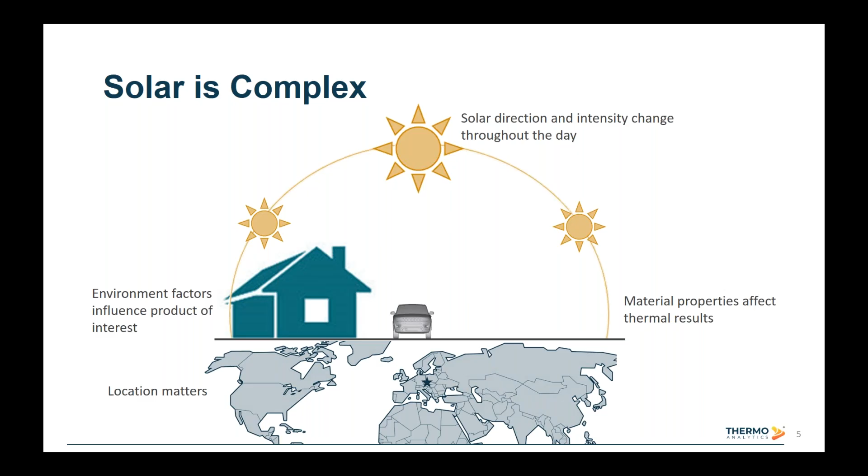However, modeling solar doesn't have to be. Within TAITherm, we include environmental effects with a weather file, which can be from any location. We include solar, direct, diffuse, and reflected. We can see in this little schematic here, we have solar reflections, which are both specular and diffuse. We have incident solar, direct and diffuse, and then we also consider radiation exchange with the sky, as well as wind convection with the natural environment.

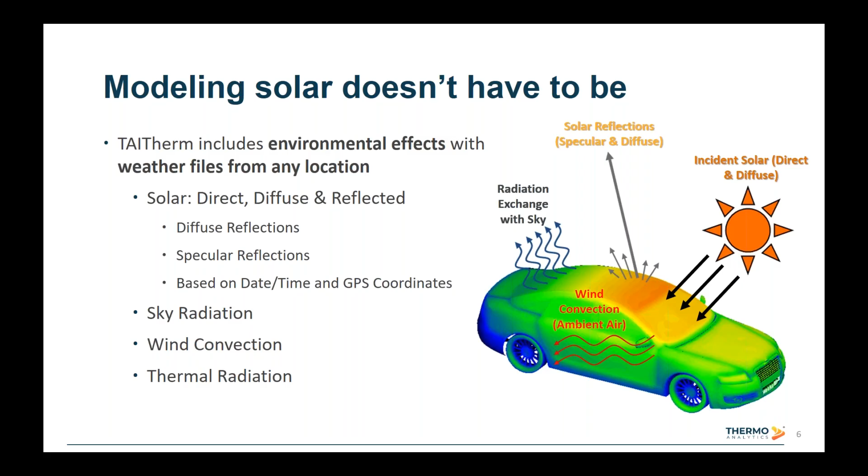Just a brief overview of the different software packages that ThermoAnalytics offers if some people on the line are not familiar. So we have TAITherm, which is the flagship thermal software. That's what all of the simulations in today's webinar were run in. And then we also have MUSES, which is the infrared signature simulation software. With both of these packages, we have a number of different extensions that can be used with them. We have battery, human thermal, exhaust, and rapid flow. We will be using human thermal for one of the examples today. And then we also have CoTherm, which is multi-physics co-simulation. And with that, we also have the drive cycle extension, which can be used with CoTherm.

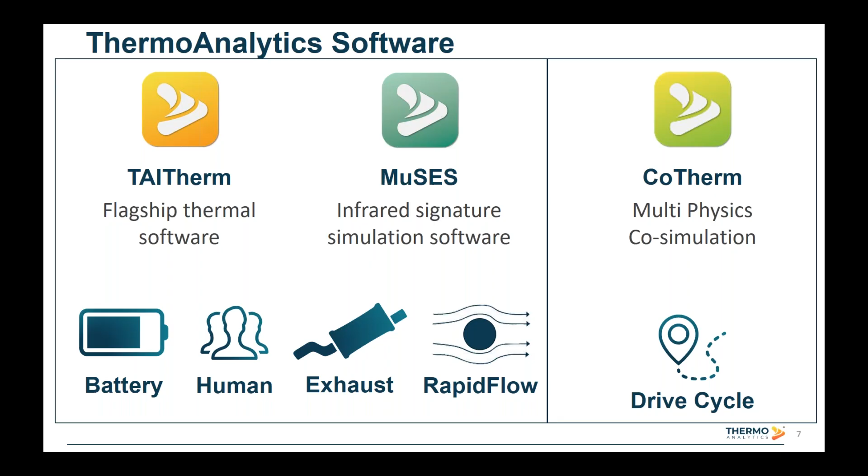Since our examples are in TAITherm, just a little more information on that main piece of software. TAITherm computes heat transfer. It predicts temperatures. It can be run in transient and steady state. It includes convection, conduction, and radiation, as well as natural environment. And that natural environment piece is the piece that we're focusing on today, since we are specifically interested in solar loading.

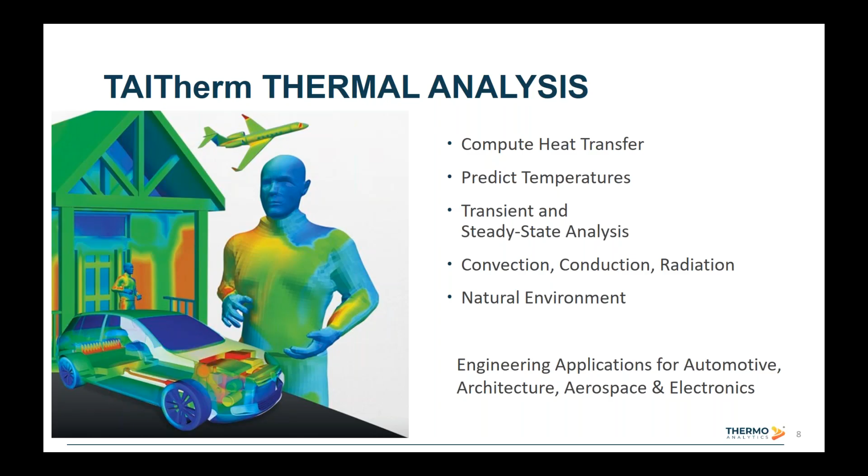Let's take a look now at our examples. So first we'll start with 2 architecture examples, the first of which is a concave glass building, and we want to look at the building effect on parking lot vehicle temperatures.

The setup for this model is a glass building in the sun. So we can see that we have this concave glass building, and then we have a parking lot in front of it with a number of vehicles parked in that parking lot. And because of the curvature of the building, we can get an increased solar loading on the vehicles in the parking lot. This particular image is showing us temperature. So we can see that we have some concentrated temperatures on that center vehicle in the front row, especially on the hood of that vehicle.

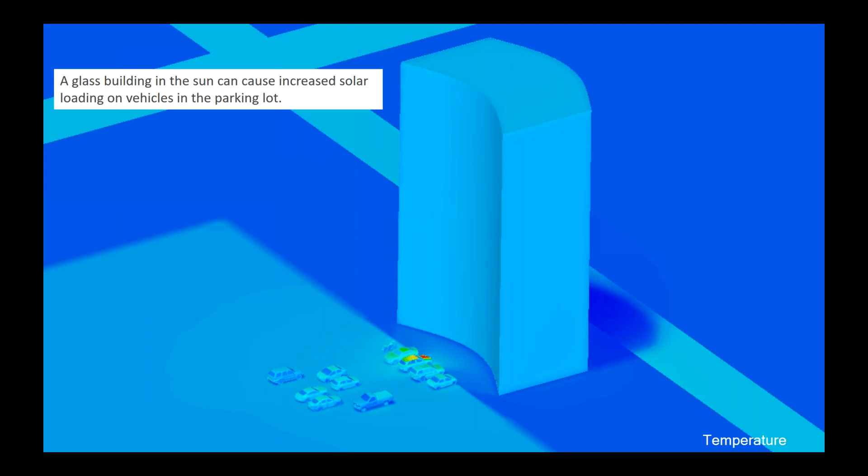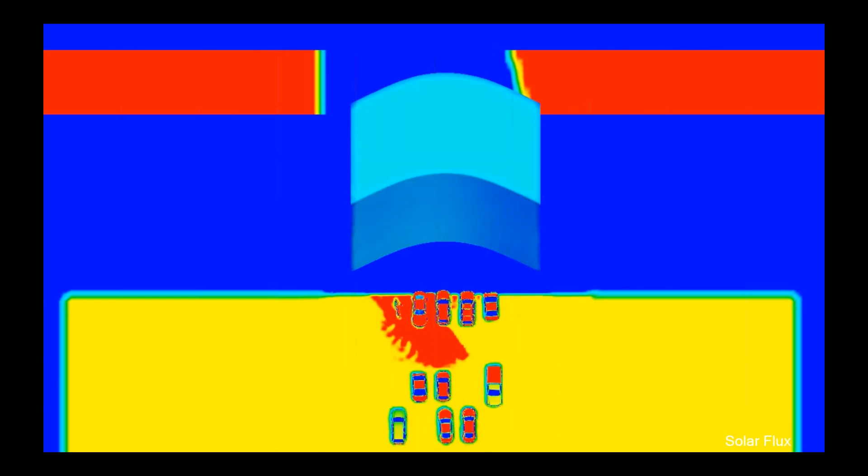We can also look at an animation of solar flux. So as the solar is moving throughout the day, we can see that those reflections are changing. And then they concentrate on the vehicle, specifically that center vehicle, around the middle of the day. And so that elevated solar flux and those reflections, that's what's causing the elevated temperatures that we saw in the previous image.

Now with our software, we can try different glass properties easily to be able to see what effect that would have on the simulation results that we're interested in. So in this particular case, we just quickly changed the glass property from what we're calling this original glass, which had the very high temperatures, to a less reflective glass. You can see that with the less reflective glass, we significantly lower the temperatures on the hood of that vehicle.

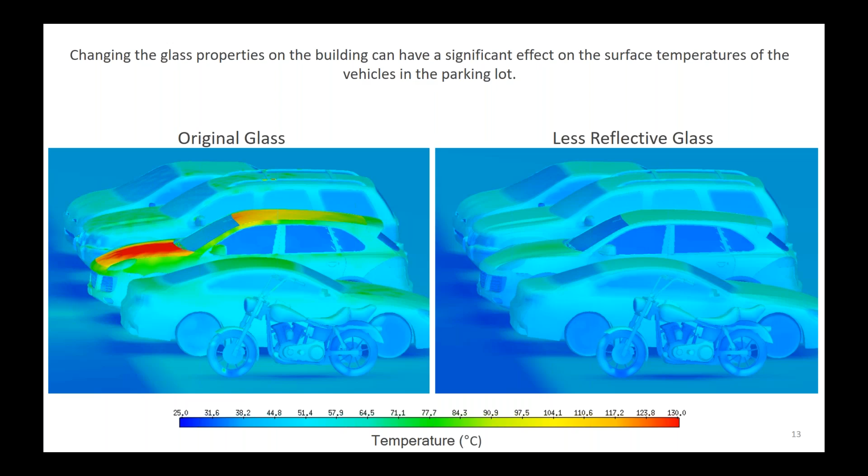Now with this, we would also want to consider what's happening to the people inside the building. And we'll look at that a little bit more in our next example with a different architecture example. So just because we change the glass to help one side of the equation, we'd also want to think about the people working or living in that building and what effect that would have on them. So we'll look at that kind of interior effect with this next example.

This is a glass office building, and we'll look at some different interior temperatures with different glazing materials. So with this, we have the building geometry, as we can see here. We have normal glass on the left-hand side, all of the blue color. So you can see a lot of the building has these big windows that are covered by this normal glass. And then on the right, we're changing that out to be a more reflective glass. That's that light green color. So we changed all of the windows, just not that glass railing, to be that more reflective glass.

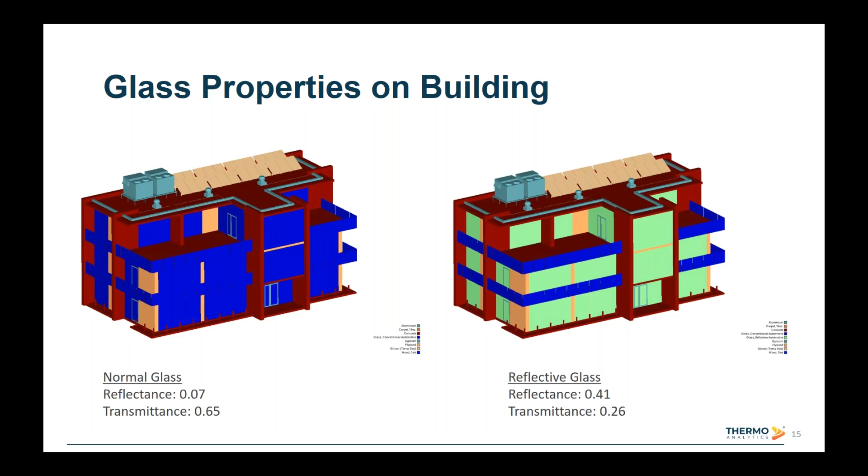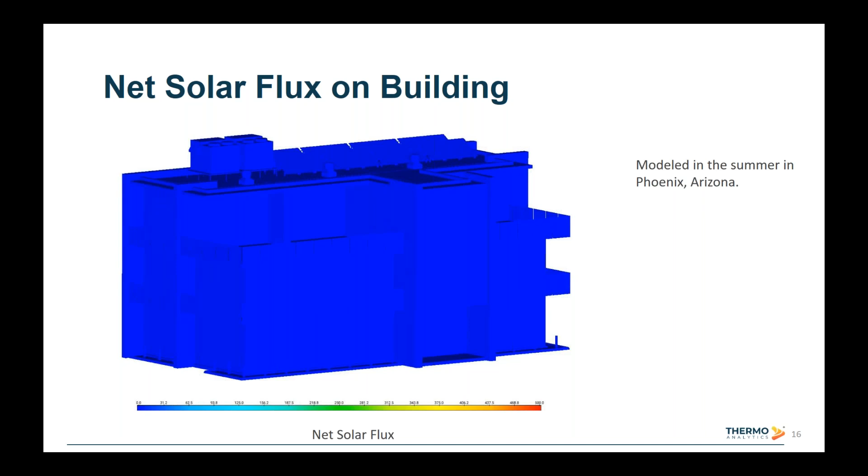And then we can see what effect that has on our model. So here we can see the net solar flux on the building. This particular model was done in Phoenix, Arizona in the summer. It was started very early in the morning. That's why we're not seeing the solar flux initially, but then we're seeing that build throughout the day and then also move across the sky.

So here we can see the difference between the two glass types. In this image, the glass is hidden so that we can actually see the net solar flux looking through the glass inside the building. So the net solar flux is higher with the normal glass inside the building than it is with the reflective glass. We can also look at this from a different perspective. So this image is taken as if we're standing in the building and then we're looking toward those windows. So we have that same shadowing of the net solar flux through the windows.

And this is just to see the values in a graphical form. So again, we can see they're pretty consistent until we get to the point where the sun is really kind of shining through those windows. We can see that uptick near the end of the simulation. And again, we can see that with the normal glass, we have much higher net solar flux than we do with the reflective glass.

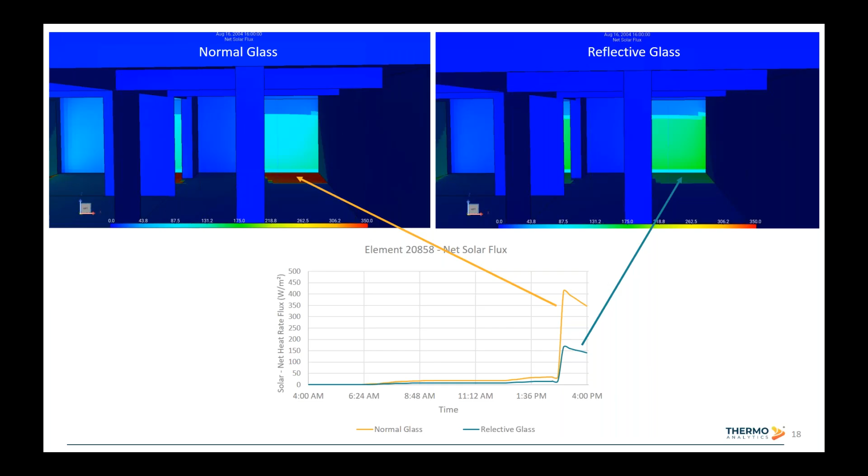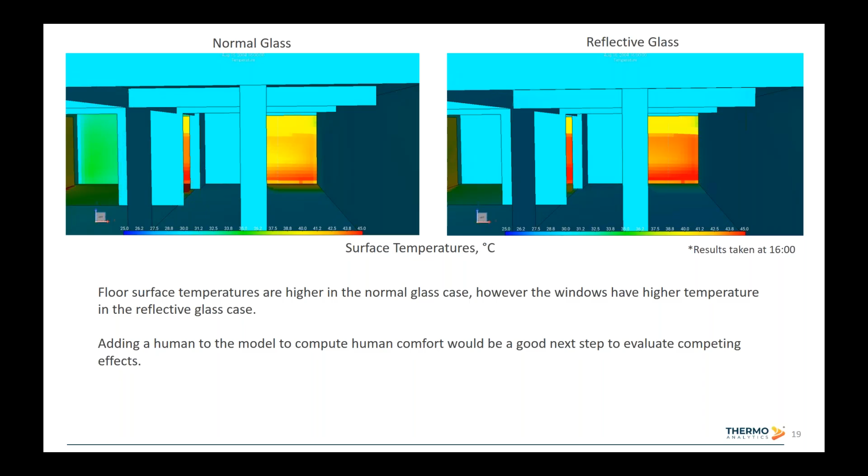What might be interesting as an extension to this model would be to add a human representation using our human thermal extension to the model to see how those different effects would affect human comfort, since they'd be a little bit competing. We'd have the higher temperatures in the reflective case, which would cause a higher radiative load on the human, but we'd also have lower solar. So it would be an interesting extension to the model.

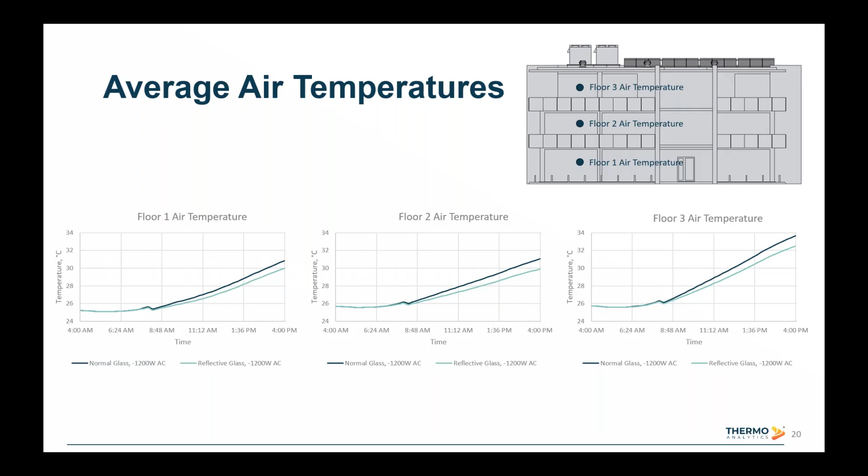Next, let's look at some vehicle applications. The first one we will review is a cabin comfort application, where we will look at the effect of glass properties on power consumption in a vehicle cabin.

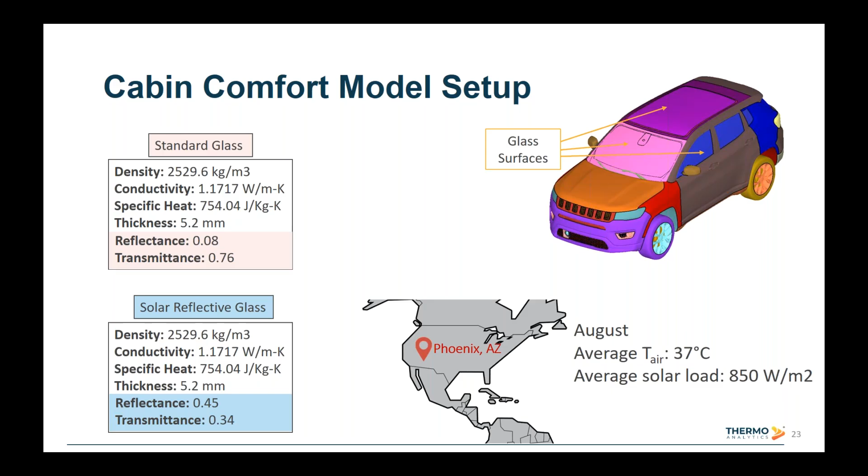And this model again was run in Phoenix, Arizona in the summer so that we can have high air temperatures and high solar loading. This model does include using our human thermal extension, and we're using 4 50th percentile humans in this model. There's clothing applied to these humans to all areas besides the face, head, neck, and their hands.

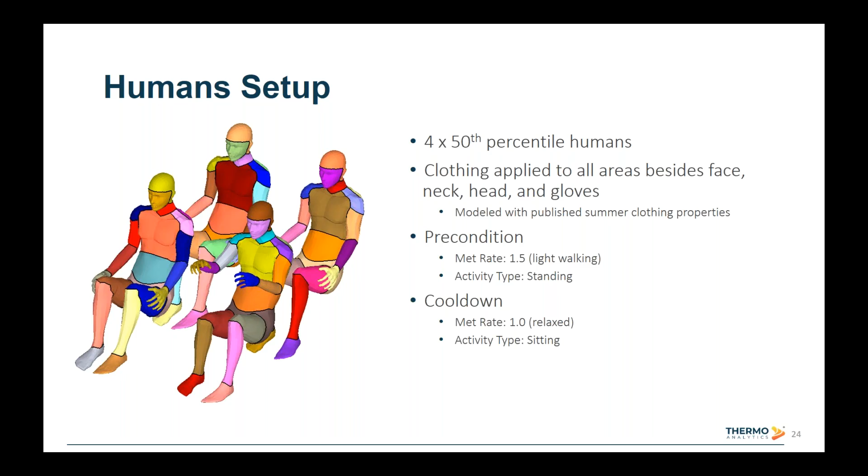And in order to run the human simulation, we do something called a precondition, which is just to run the humans before they enter our model of interest. So our model of interest is when they're in the cabin. And before that, we have them engaging in some light walking. And then when they're in the vehicle itself, they're going to be sitting and relaxed.

The cabin itself will also have two different models that we run. First, we run a solar soak. This is going to be our hot soak, where we have the high temperature and the high solar loading. We have no cooling power applied, and this is the vehicle only. So this is just the vehicle sitting in the hot sun.

After we run that, we will then follow it with our AC cool down. This is the same environment as our soak, but this is where we're going to apply the cooling power, and we'll also add the humans into our model.

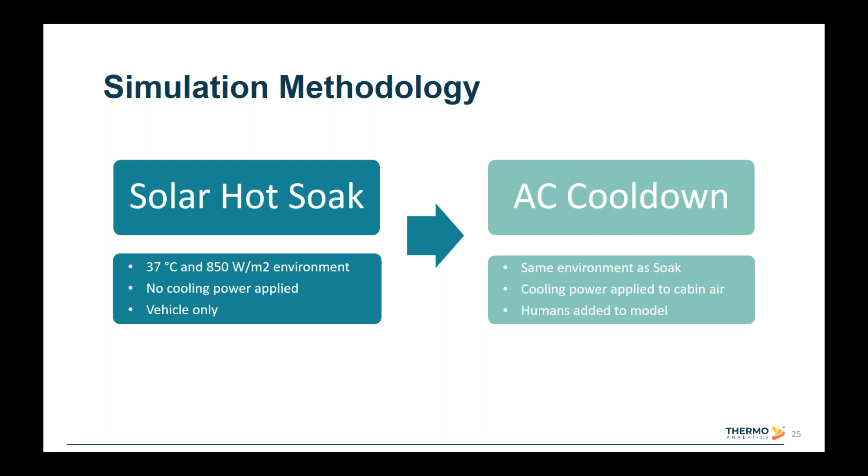So first, let's just look at some results from the solar soak. Here we're looking at solar flux, and we can see the difference between the standard glass and the reflective glass. So again, like we were seeing in the architecture example, with the standard glass, we have higher solar flux than we do with the reflective glass inside the vehicle. And just to be clear here, the windows are hidden in this view so that we're seeing the solar flux inside the vehicle kind of through the windows.

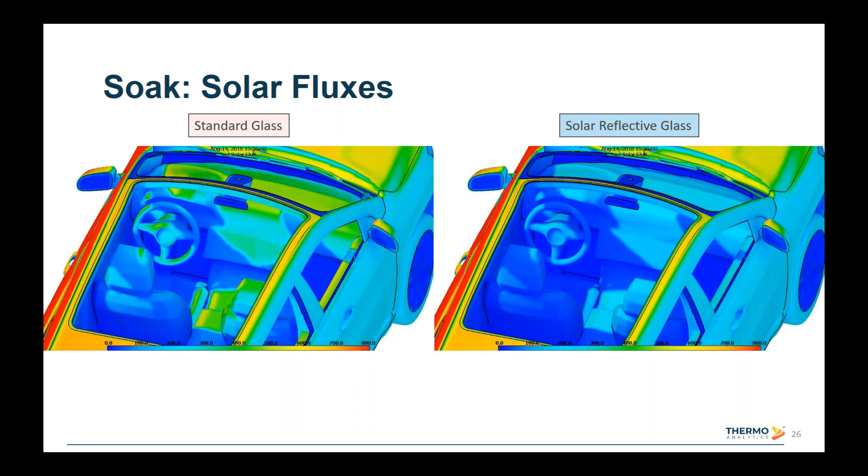So next we have the cool down model. For this model, this is using a simple fluid network within TAITherm, and it uses a sensation-based imposed negative heat rate. This is done using a PID controller. And if we follow the schematic at the bottom here, we can kind of see how this is done. So our model will report driver thermal sensation. That then is used as an input to the PID controller.

The PID controller then sees if that sensation is above or below neutral, and then will give a new imposed heat to the heater fluid node based on that input. That imposed heat is then going to change the cabin air temperature. That cabin air temperature is then going to affect the driver sensation, and we will continue that loop until the end of our transient simulation. What this allows us to do is compare the overall imposed heat between the two designs to be able to determine power savings.

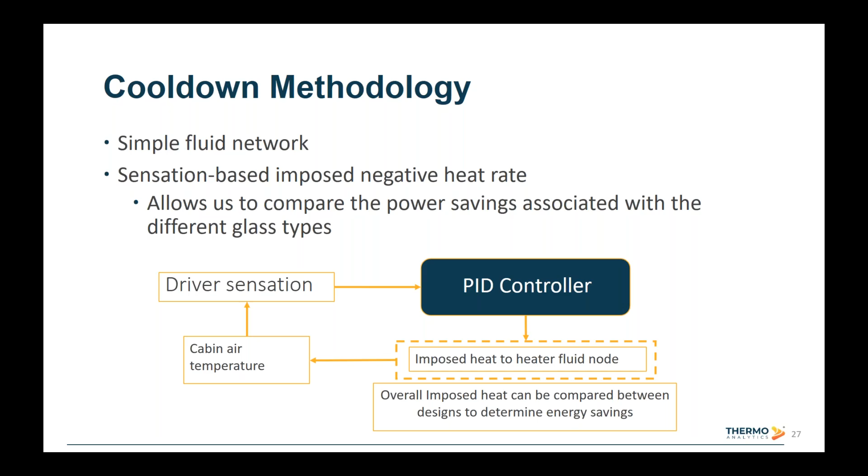So let's look at these two models. Here we have the glass hidden again, but here we're looking at the surface temperatures. And we can see that these are fairly similar between the two models because we are applying cooling, but we can see some key differences if we look at the dash. The dash in the standard glass case is still warmer than with that solar reflective glass case.

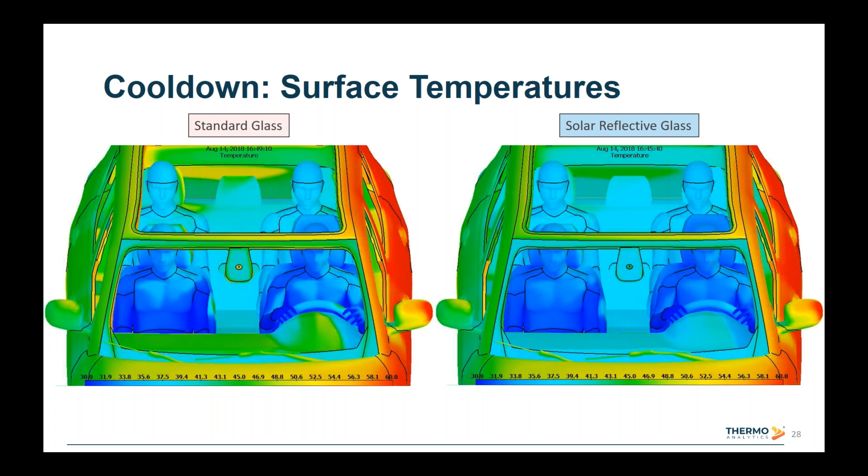So let's look at the air temperatures. We can see that the solar reflective glass case ended about 2 degrees higher than the standard glass case. And that would lead to the question, why does the solar reflective glass case result in a higher air temperature, even though we're using this controller? So the solar reflective glass allows less incoming solar radiation, so that humans can tolerate a warmer air temperature while still maintaining the same thermal sensation as the standard glass.

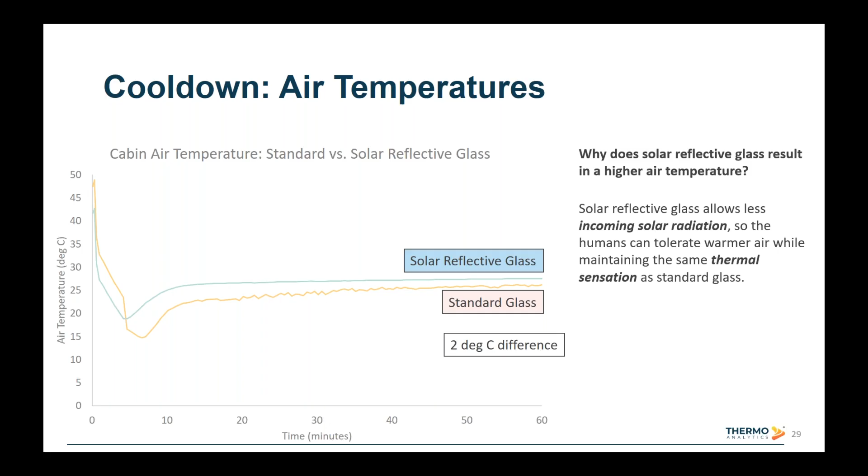So again, we're targeting the same thermal sensation, not simply an air temperature. So that's why we see that difference. We are maintaining the same sensation. It just, again, the humans can tolerate that warmer air temperature because they have less solar coming in and hitting them.

And then finally, we'll look at the power consumption. So we can see that the power consumption with the solar reflective glass is less than the standard glass. Again, if you look at the units of power here, kind of a higher line is actually less because it's closer to 0.

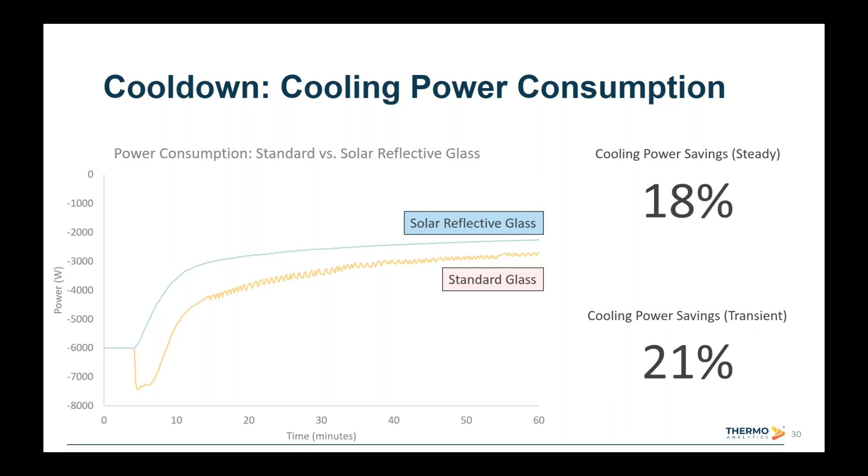So if we look at just the steady state, so just looking at the very end of the graph near 60 minutes, the power saving was 18% for the solar reflective glass compared to the standard glass. And then if we include the entire 60-minute duration, the power saving was 21%. So a little bit higher in the transient than with just looking at the steady state.

The next example that we will look at is a derating example, where we'll use TAITherm to assess component temperatures under high solar loads.

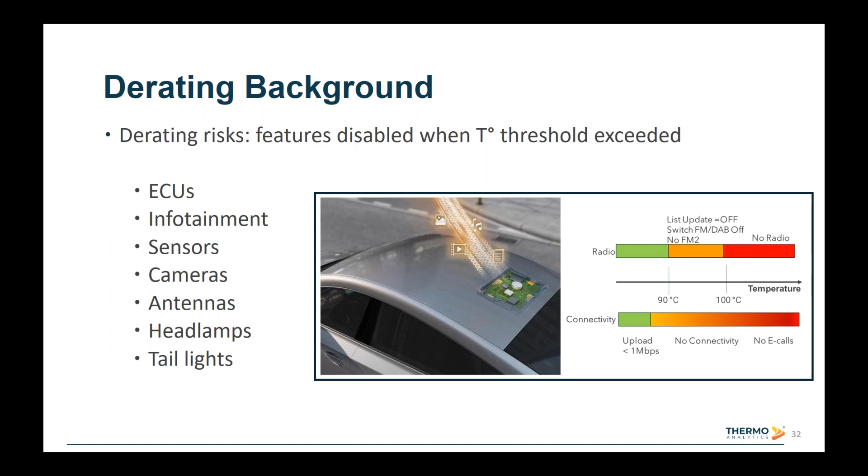So just a little bit of derating background. Derating carries some risks of features being disabled when a certain temperature threshold is exceeded. This can happen in many different components in a vehicle, such as ECUs, infotainment centers, sensors, cameras, antennas, headlamps, and tail lamps. And then in this little schematic, we can see that there are certain temperature ranges where different things will no longer work. So with the radio, you have a safe zone, then you kind of get into this orange zone. And then finally, if you exceed a certain temperature threshold, you will then have no radio.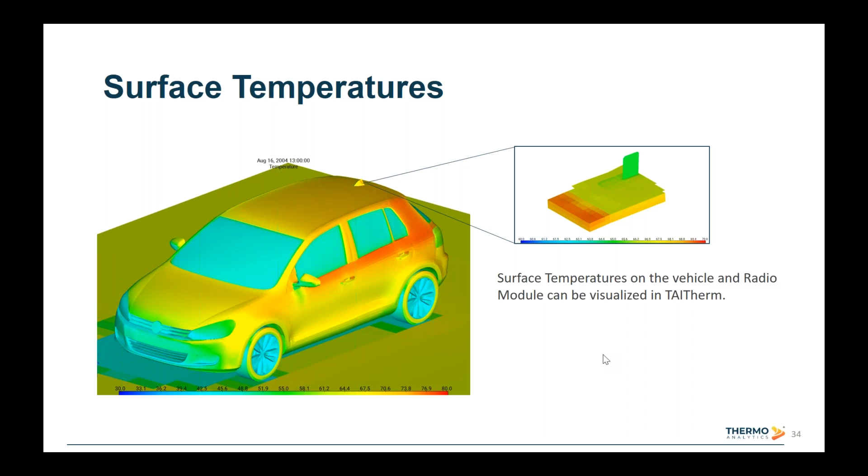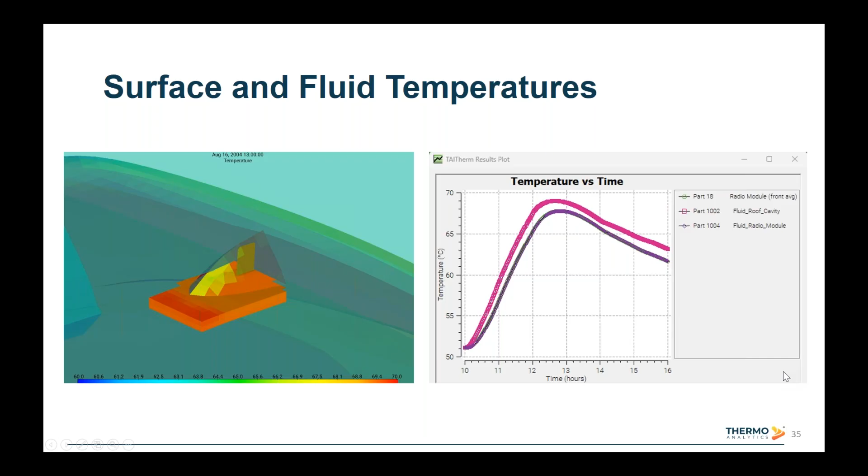This is just looking at some different surface as well as fluid temperatures. There are different air temperatures that are modeled within the shark fin and then within the roof cavity. So we can see that the roof cavity becomes the most elevated, reaching almost 70 C. We then have the fluid within the radio module, which again is the air temperature within that module, and then the module itself. So we could use this information again to compare it to see if we're reaching any of those critical points where something would stop functioning.

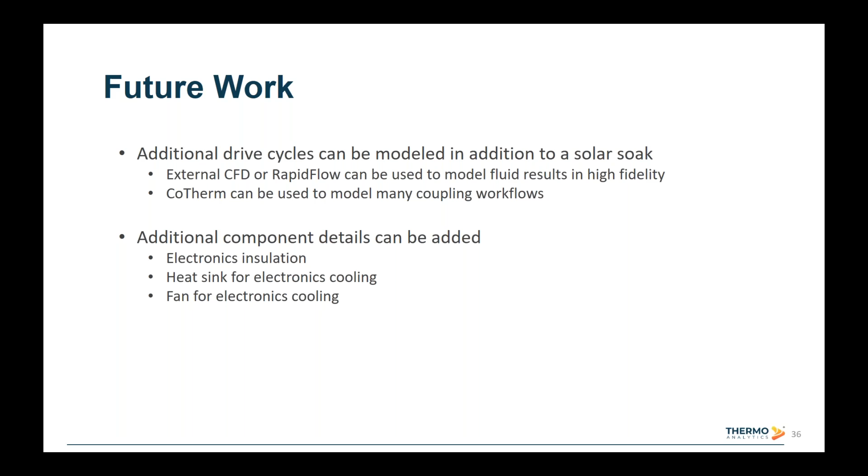Some future work in this area could be to add some additional drive cycles to model in addition to just simply a solar soak. And we could also add additional component details, such as looking at different electronics insulation, heat sinks for the cooling, as well as a fan for electronics cooling.

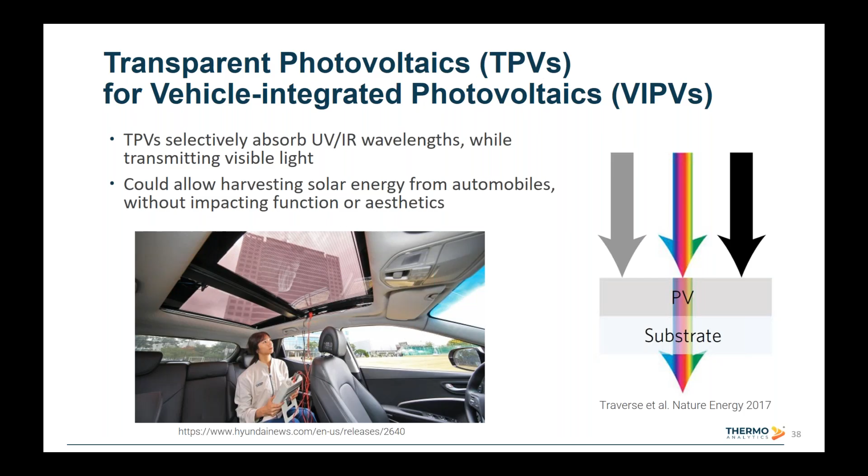The last example that we will discuss today is transparent photovoltaics for vehicle integrated photovoltaics. We'll look at the annual energy production comparison based on the surface area covered in these TPVs. So TPVs for VIPVs, transparent photovoltaics for vehicle integrated photovoltaics. So TPVs selectively absorb different UV and IR wavelengths while transmitting visible light. This could allow for harvesting solar energy from automobiles without impacting the function or the aesthetics. In this image, we just see an example of what that could look like with one of these VIPVs integrated onto a sunroof.

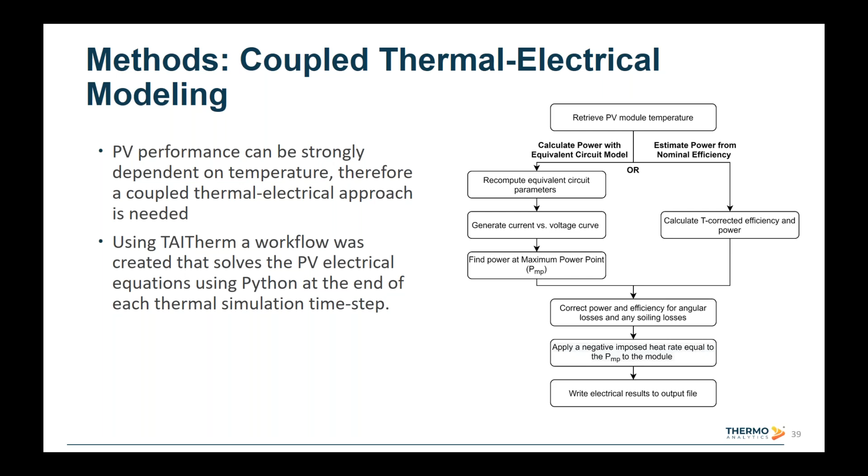So we're going to use that approach to compare 3 different modeling scenarios to look at the annual energy created by these different approaches. So model 1 is using a conventional mono-Si rooftop module, and the surface area of this module is 2.8 meters squared. In the image there, it's that gray portion of the vehicle covering the entire roof. The second model is using TPV films installed on the windows only. The surface area of all of these windows is 5.54 meters squared. And in this image, it's all of the pink. So we have a sunroof in this model, as well as all of the traditional window placement.

And then finally, we have TPV films covering the vehicle's entire external surface area. So that would be all of the light pink in the image, as well as that darker magenta color. And this surface area is much higher, coming in at 16.45 meters squared. In these 2 models, the TPV films are modeled using an estimated achievable efficiency of 15%, and then also the spectral properties as shown in the 2 graphs.

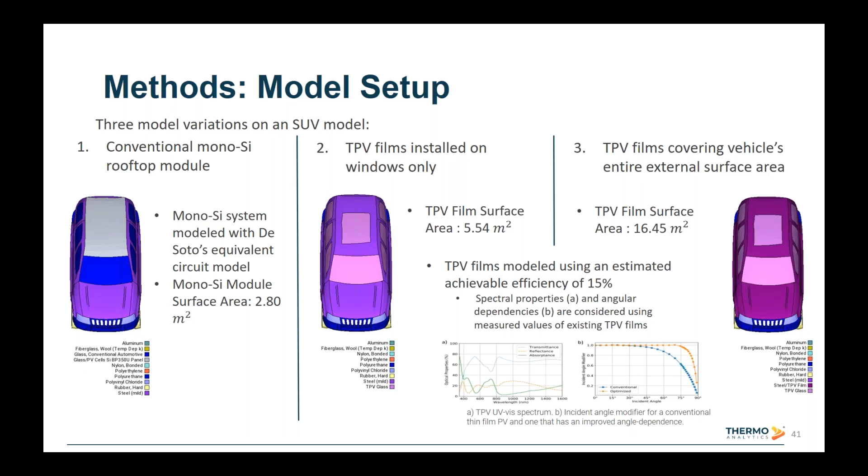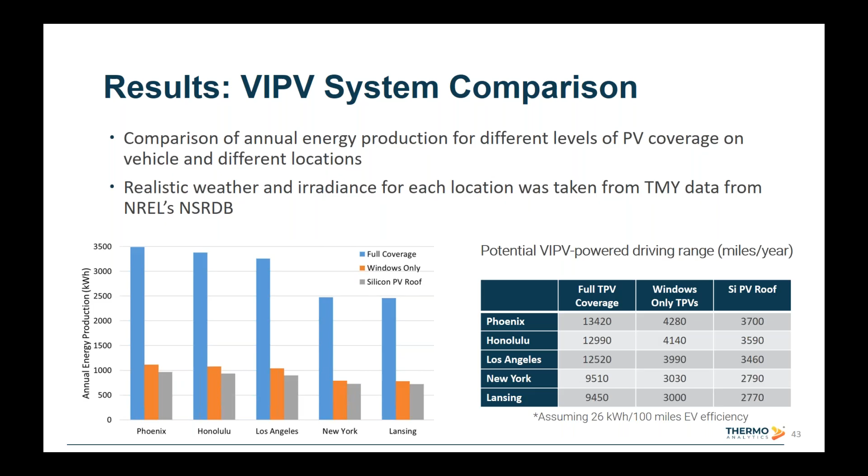So then we can look at those 5 different locations for the different coverage options. Again, the TPV coverage is going to be the highest, followed by windows, and then followed by the Si PV roof. Next, we'll look at a few different options for automating with TAITherm.

So sometimes when we are modeling these different solar cases, we may want to add some automation in if we want to look at multiple locations, like in that last example. So maybe we don't just want to run one location, but we want to run many locations. We could automate this by providing a folder that has all of these different weather files, and then having TAITherm easily loop through these different weather files and output some information that we want to look at by adding in some automated post-processing.

This can be beneficial to understand the effects of a range of weather, not just a worst case scenario. TAITherm has multiple options for plotting, surrogate modeling, and sensitivity analysis, and these would all help us to run and analyze many iterations of scenario, weather, and material properties.

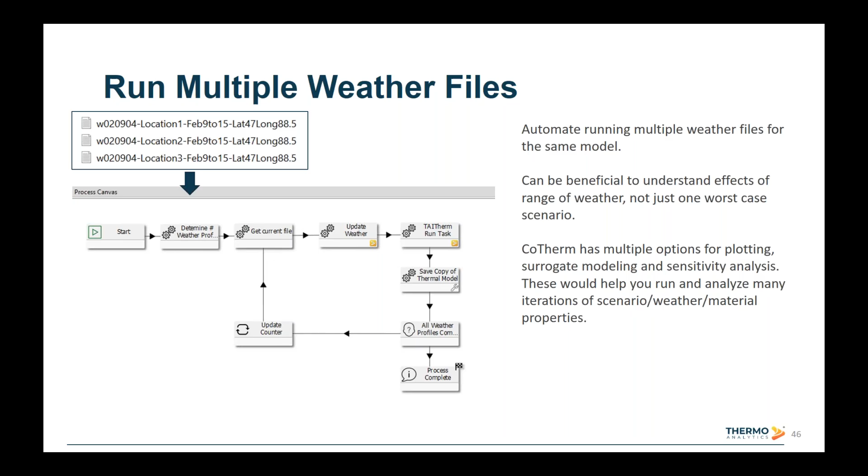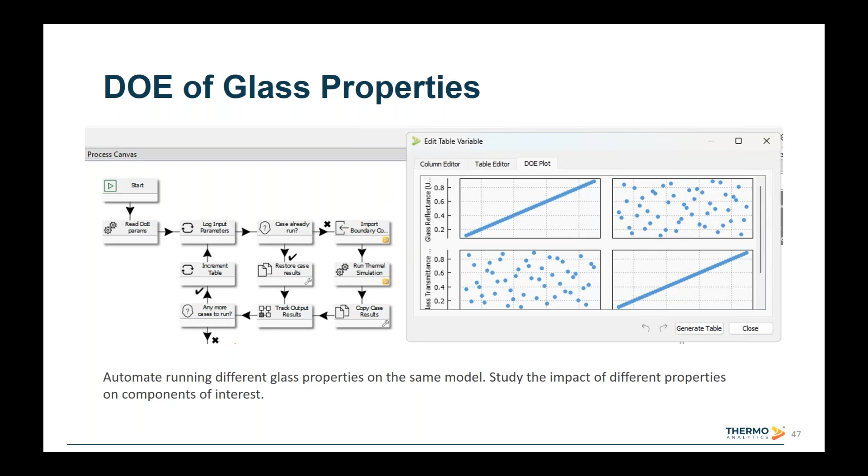Finally, we'll wrap up with some conclusions. So in conclusion, solar heat is a complex 3D phenomenon. Understanding these effects efficiently requires fast 3D simulation and analysis techniques. A robust simulation and analysis process will allow you to predict and mitigate design issues related to solar heating and thermal management early in the design process.